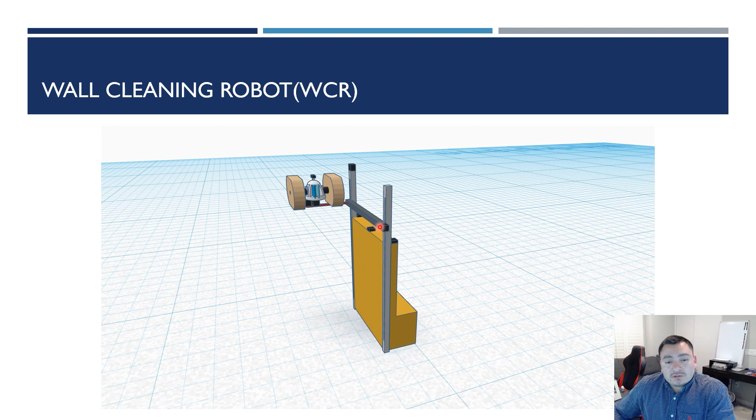This is my wall cleaning robot. It has an arm that has the cleaning tools. It has an X and Y system that will move it up and down and left and right. And it has various sensors that will help it navigate.

Besides the linear system, it will have a motor that will rotate the cleaning supplies to help it choose the correct cleaning tool that it will need, be it the solution for glass or wall or the polishing sponges for glass and wall. It also has a moving system on the bottom. This module here will make it move front and back, and this one will make it rotate left and right.

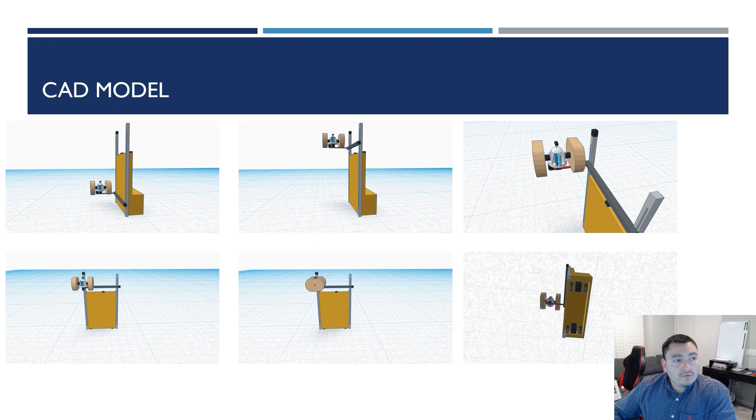This is my circuit. I use 3 servo motors, 5 DC motors, 1 ultrasonic sensor, 2 9-volt batteries, 3 controls for the motors, an LED, 1 photoresistor, various resistors, and 1 Arduino board.

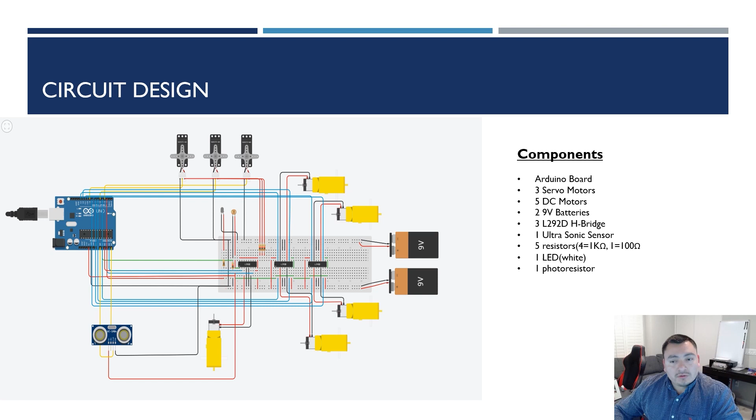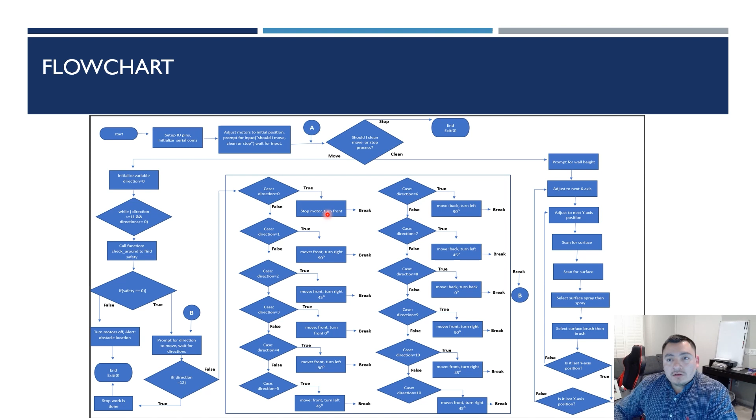This is my flowchart. It has the 3 different functions, and then each function follows its own path. I will explain it when I explain the code in the circuit. This is my code. Again, I will explain how it works in the next slide.

You will set up the variables, the pins, and start the serial communications. It will go into the main loop. I will set up the servo motor, and it will ask the hub for directions. So I'll start it. So I'll tell it to move, and it will ask me for the moving codes, which is to tell it to move left, right, front, and back.

So I'll tell it to move front, and this DC motor will start moving towards the front, and it will turn the servo motor towards the right. Now I'll tell it to move back, and we can see it got negative, so it's going to the back now. And I'll tell it to stop, and it will ask me what to do now, and I'll tell it to start cleaning.

It will ask me for a wall height, which I'll put 2 in this case, just for an example. We can adjust the wall height. So it will start by identifying the surface of the wall, glass or regular wall, by shining the light, and the photoresistor will receive the reflection, and will identify what kind of wall by analyzing the light intensity.

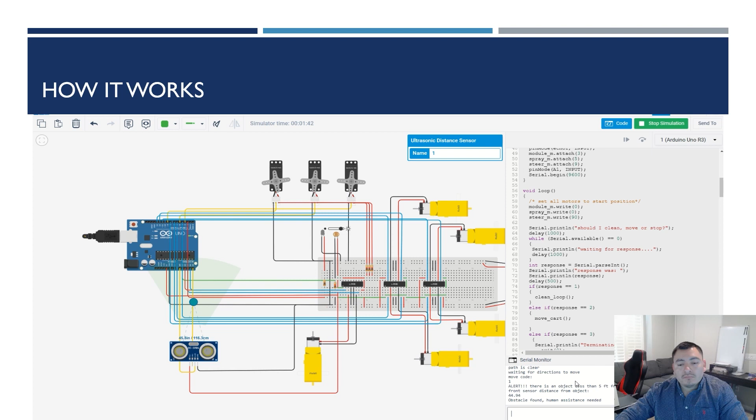Hi, my name is Tristan Hogue, and this is my design for a floor cleaning robot for our swarm. The physical model is a 12-inch diameter circular framed robot powered by 8 motors, one for each wheel for omnidirectional traversal of its environment, one for the sweeping comb, one for vacuum suction, one for a mopping brush, and one for cleanser spray jets.

This model contains a front-mounted push bumper for retrieving small debris and has 3 ultrasonic sensors for analyzing its distance to objects and determining its own motion. It also contains an LED battery level indicator on the top that's an array of 4 LEDs.

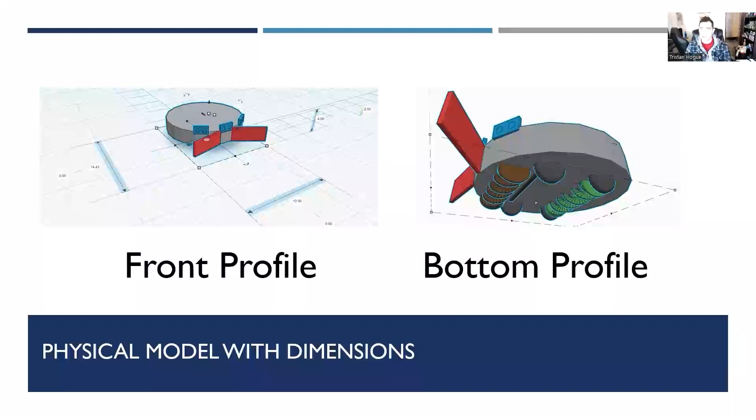In the electronic simulation, I designed 2 versions, one with radio communications and one with a wired serial connection, because Tinkercad doesn't support the full Python suite for UART protocols on micro:bit. To display this functionality, I have connected the micro:bits to 2 bidirectional logic level converters to allow the 5-volt Arduino to communicate with the 3-volt micro:bit, using 2 pull-up resistors with an N-type BJT to convert between the logic levels on its inputs and outputs for receive and transmit.

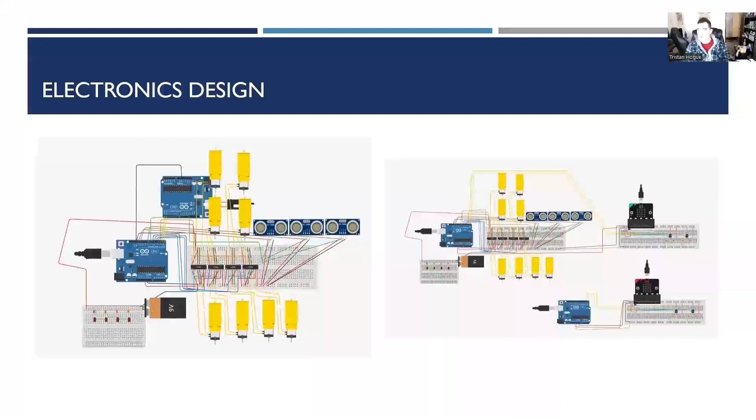I have also shown that my 8 motors are connected through H-bridge motor controllers, and the 3 ultrasonic sensors, and an array of the 4 LEDs connected to our 9-volt power supply. The code begins with a check for serial commands in the primary loop and begins operating through various functions to complete tasks. As you can see, I have quite a few functions here, all the way to the bottom. A lot of code went into this.

But after it has received the start command, it will engage its cleaning motors and begin checking its own distance and position relative to other objects in the room, and it is going to continue to check if it is stuck. And if it's stuck, it's going to flag the operators, turn off its motors, and kind of sit and wait until it is fixed. So I'm going to go ahead and engage the simulation and demonstrate those 2 items.

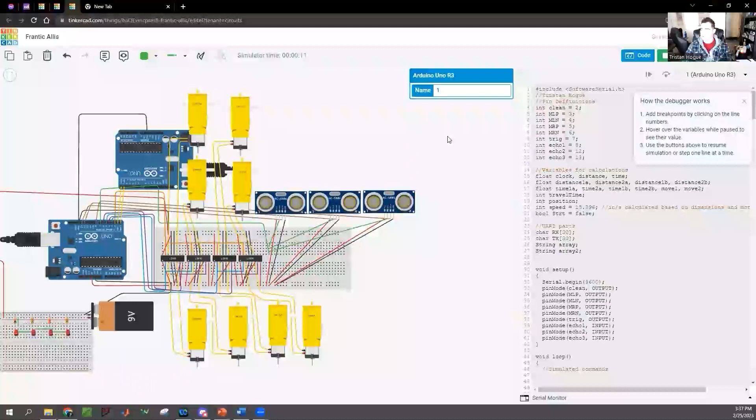So in the serial monitor, you see I have it set to flag that it has received the command, and now you can see that the motors have turned on. There's going to be a brief delay while it runs through its operations of checking its motion, and because I haven't been simulating motion along the sides here, it's going to realize, oh, I'm not moving. So I'm just going to sit here and turn off my motors, and then they just switched off.

Now, had I been able to simulate the motion, it would have kept going, and had I put the distance under 5 inches, it would have determined that that was an object, and it would have tried to push it. If it couldn't push, it would have flagged the trash bot to come assist it in moving objects that are too large for it. This is my logic design for the entire code. It covers all of the scenarios that I've programmed in, with all of the various loops, where they start, where they terminate, and where they return back into the system.

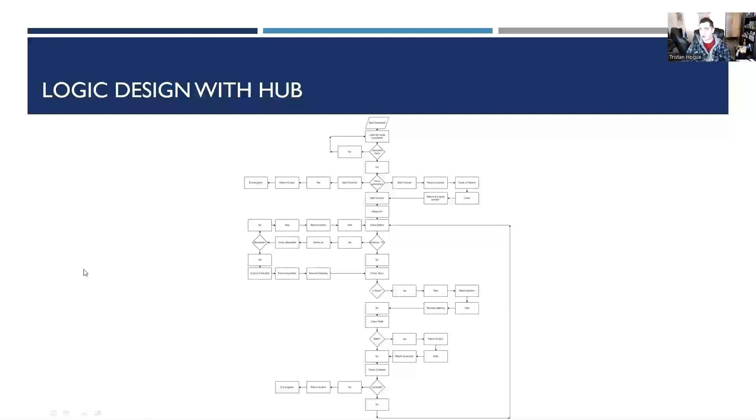Up next is my simulation for the central hub. This is the logic design for how it communicates with the entire swarm. As you can see, based off of the labels in here, the device simply acts as a relay between the human operators and the swarm's individual robots. It tells them when to start cleaning, it receives data from them, and it reports commands between them, so that the entire operation can run smoothly.

Code for that is simulated in the same position, one Arduino up, and right now I have a simulated command just to tell our other Arduino when to start. Normally this would be programmed to start at a certain time, or a human operator would have to push a button. But after it runs that and does this print, it's going to be continuing to check for its own commands.

And it will have various cases. I use a switch case statement for it to receive certain flags, along with receiving integers and floats for various data types. And then it will perform those functions, such as it will periodically receive the time and position data of all of the robots so it knows where they're at and what they're doing at all times.

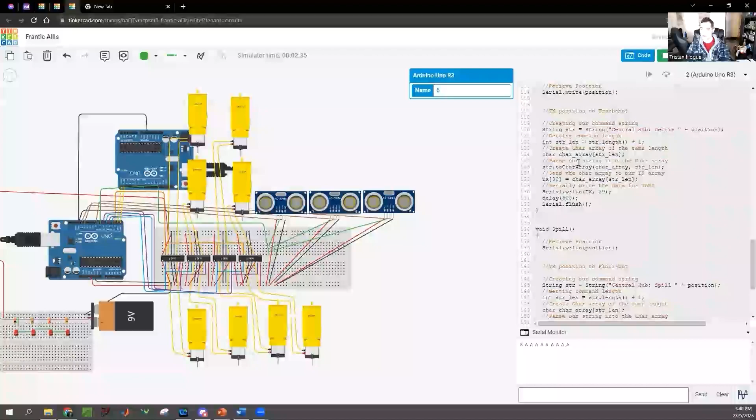And then if there is a flag for something that needs to be done that that robot cannot do themselves, it will transmit it to the appropriate robot and make sure that all of the cleaning items are done within the necessary time limit. My portion of the swarm, as well as the central hub, can be described as radio controlled, serially processed, and locally computed.

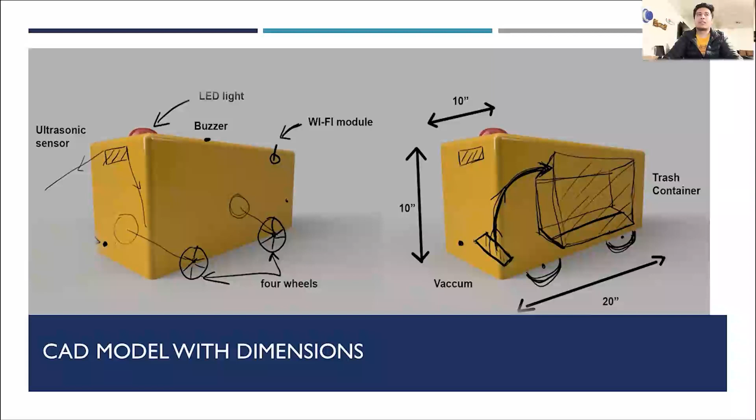And for the dimension, I have tried to make it as small as possible, so with a height of 10 inches and length of 20 inches. And the next is the circuit board. So here in the circuit board, I've used a 9-volt battery. It will pass the power to the Arduino board, and the Arduino board I use as a microcontroller.

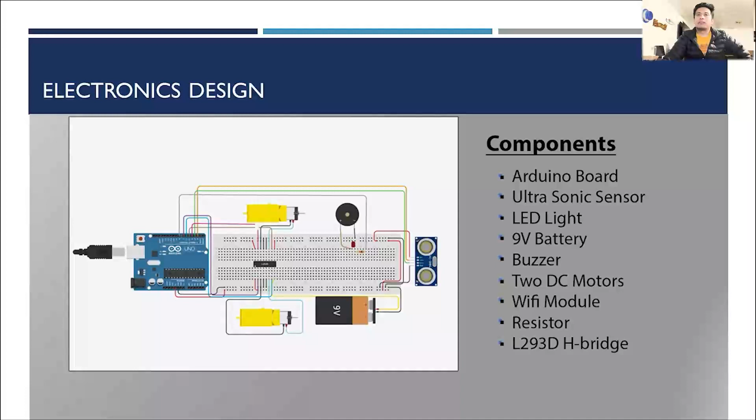And the next is the Arduino code flowchart. So once it gets the notification from the hub and other robots about the trash location, it will calculate the path toward the trash location. It will check if it has reached the location. If it has not reached the location, it will continue moving toward the location, and on the way it will check whether there is any obstacle.

If it finds any obstacle, it will stop there and reroute the path toward the target location, and it will continue until it reaches the target location. And once it reaches, it will check whether it has an instruction to collect trash or return back to the hub.

So if at first there is an instruction to collect the trash, it will collect the trash until all the trash is collected, and goes to the decision. So it will check the decision tab. Like once it collects all the trash, it will set the decision.

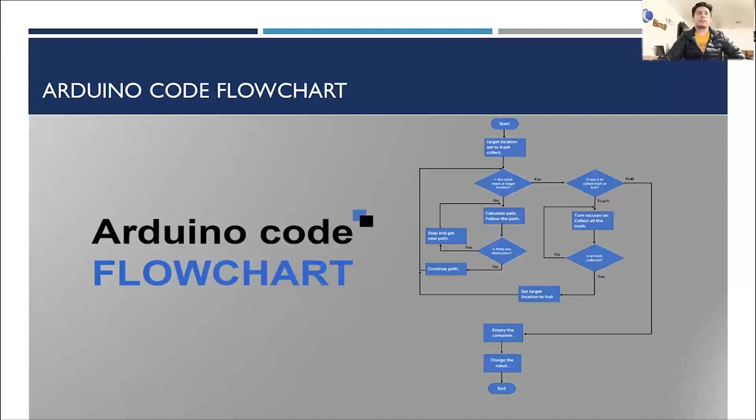It will set the target to the hub, and so it will return back to the hub and empty all the trash, and lastly it will go back to the rest mode.

So here is the circuit board of the trash bot and the Arduino coding. So in the top and bottom you can see the two motors. They're for the left and right wheels, and it has a distance sensor. There's one LED and buzzer, and it is all powered by a 9-volt battery. So let's see how it works.

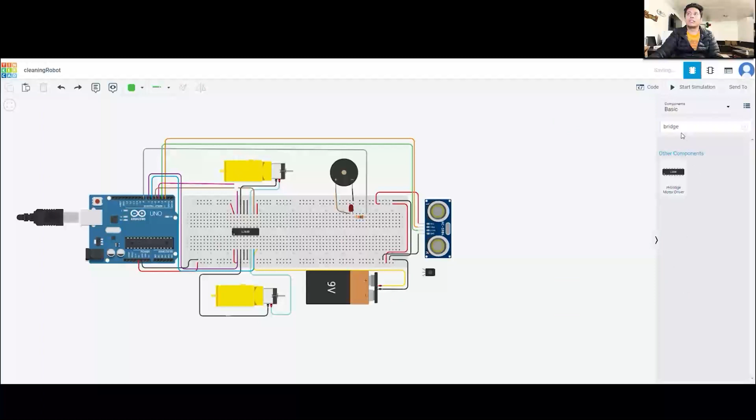So right now there is no obstacle in the front, and once it gets a command from the hub, all the motors will move forward, and as instructed from the hub, it will move back, left and right.

And when the obstacle is less than 11 inches, all the motors will stop, and the LED light will turn on. Also the buzzer will make a noise to alert, and it will automatically find another path, and as per instruction from the hub, it will continue moving and avoid the obstacle.

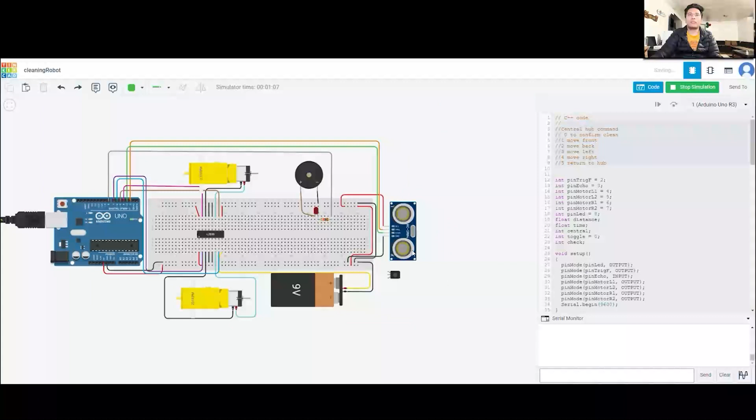Okay, so the motor is controlled by an H-bridge. Once it reaches the target location and collects all the trash, it will return back to the hub, empty the trash, and charge the robot.

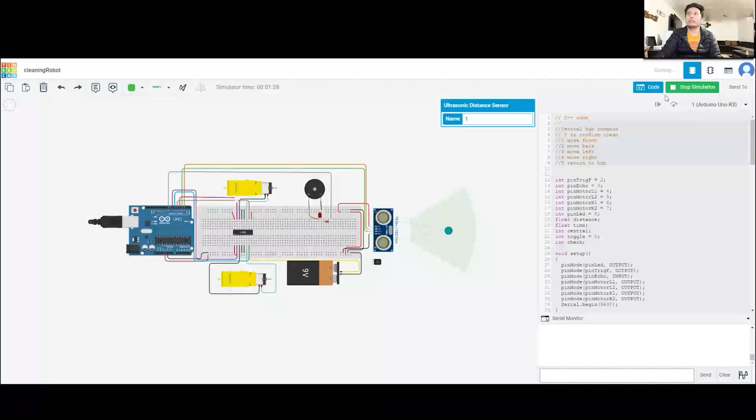So here is the entrepreneurial aspect. The robot is very cost effective, and all the costs are based on similar technologies. For the floorboard, the electromechanical system will cost around $800, structural cost is around $900, and its annual maintenance is only $300.

For the wallboard, the electromechanical system is $1,000, the structural cost is around $1,000, and annual maintenance is $500.

For the table board, the electromechanical system costs around $1,000. Structural cost is around $1,500, and annual maintenance is only $300.

And lastly, the trash board. The electromechanical system is around $800, structural cost is around $1,000, and annual maintenance is $500.

So why should customers get this Swarm robot? The main reason is it cleans 1,000 square feet of floor, 65 square feet of wall, and 30 square feet of tables within 2 hours. That is equivalent to 10 people's job.

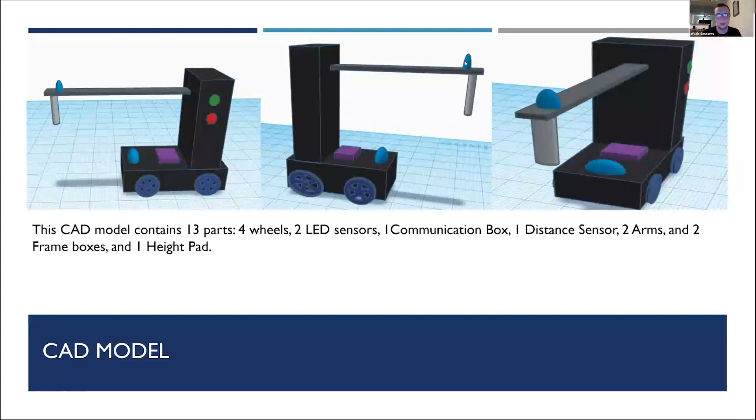For circuit design, the screenshot on the left depicts the robot traveling to the desired location, as you can see from these two motors moving. The motor on the left controls the front two wheels, and the motor on the right controls the back two wheels, so we want these running simultaneously together.

The screenshot on the right depicts the TableBot actively cleaning a horizontal surface, as you can see from this motor. This controls the arm of the robot, which would clean off the horizontal surfaces.

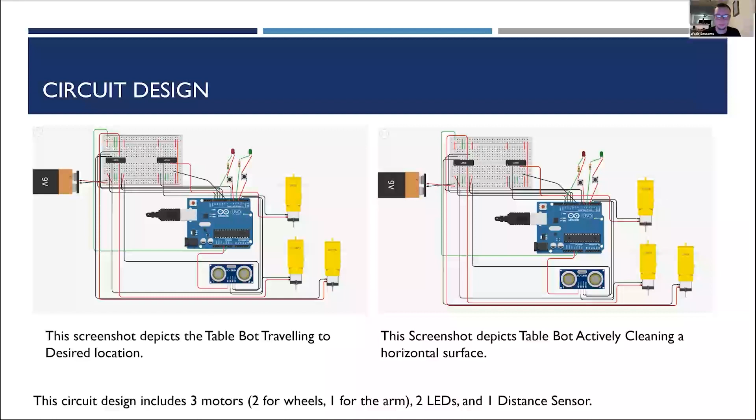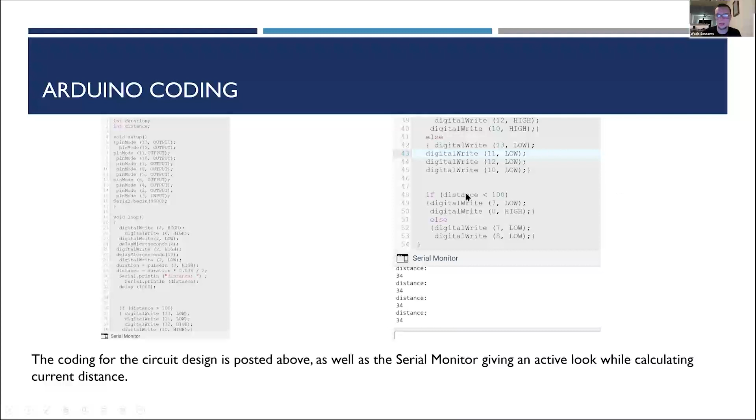For our coding, this is what I have. I set up all my pins, set up my distance sensor with this right here, and then I gave some if-else conditions to allow the robot to go through its processes.

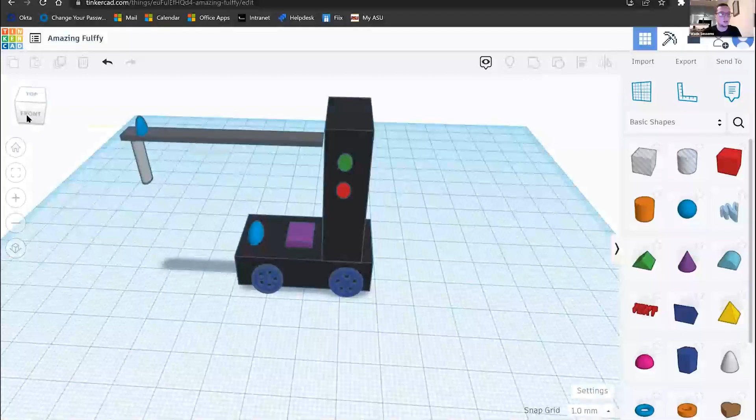So this is the actual 3D CAD image we use for the TableBot. As you can see, there are 4 wheels, a distance sensor, communications box, height pad, 2 arms, 2 frame boxes. On this side, you have your 2 LED sensors: green would be going, and red would be off.

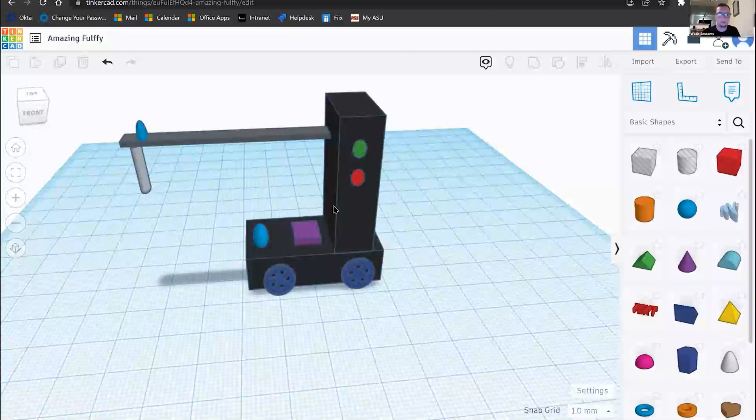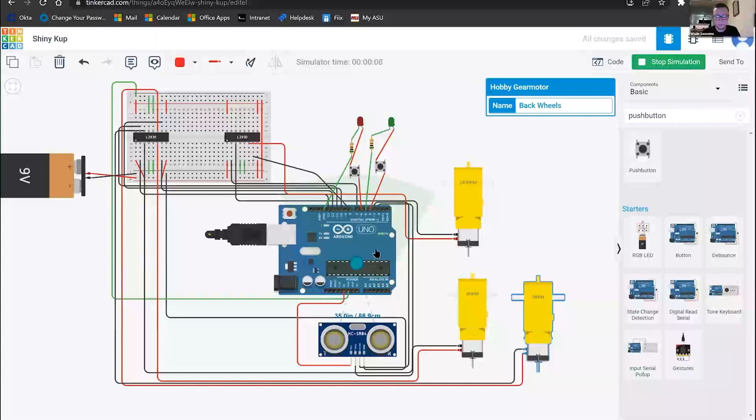So to the circuit, this is the circuit, and we will start simulation. If we are below 50 here, or in between 50 and 100, that's when our arm will start moving.

That gives the robot knowledge that it's in position to start cleaning. If we still have a further distance to go, let's say 174 centimeters, we will move towards the robot or towards the cleaning area.

And if we are too close to the cleaning area, let's say we come down here to underneath 50, now we're going to move in reverse. That way we can position ourselves to get to the right destination.

So let's say we're moving in reverse, we're going up, we're back up here to 60. Now our arm's going to start moving and start cleaning off the table.

Once it's completed, we'll back up, and then we would take off again, going in the forward direction.